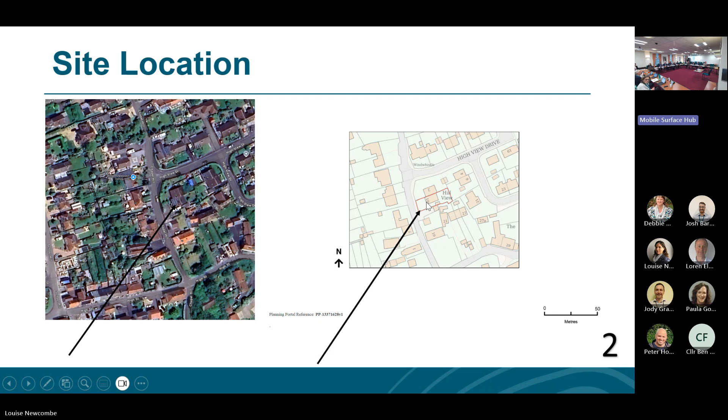As you can see here, this is an aerial of the street scene. The property is this little property here. It's quite a slightly higher gradient compared to the other properties surrounding it, slightly lower than this property here. And as you can see on this block plan here, the location of the property in relation to the surrounding dwellings.

This is the existing and proposed site plan. On the left is the existing and on the right is the proposed dormer highlighted in black, and then the outline of the single story rear extension.

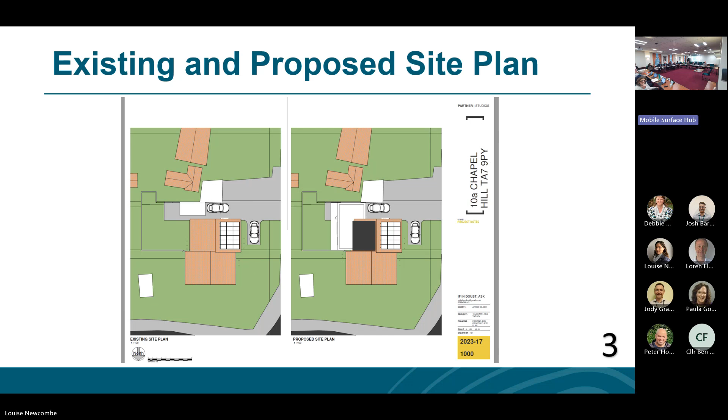So these are the existing elevations of the dwelling. As you can see, it's a semi-detached bungalow. And this section here is number 2 High View Drive, which is attached to, but it's slightly set back in a lower elevation to the bungalow.

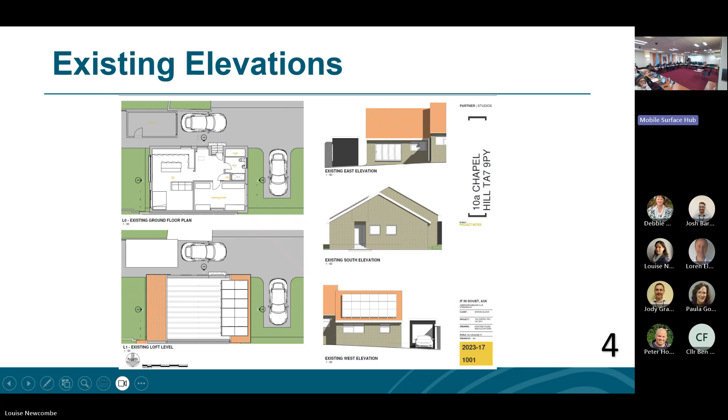These are the proposed elevations. As you can see, this is the proposed dormer and then the single story rear extension to the property.

This is an amendment to what was originally proposed. Originally, the exterior materials were black in colour, so we requested a change in external materials to match the existing dwelling. So the dormer will be like a grey cladded exterior, and the extension will match the rest of the dwelling.

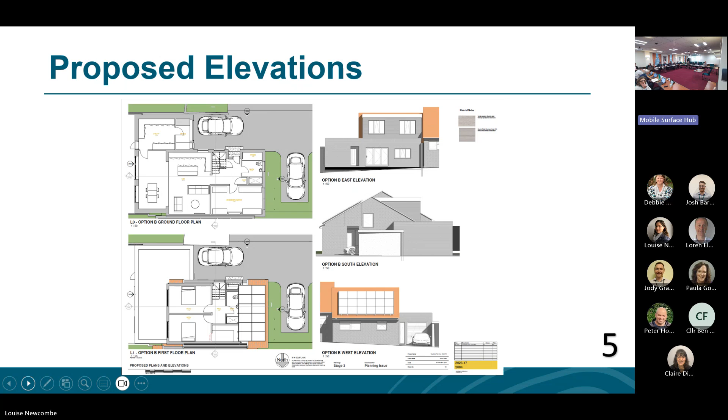This is a view from the rear of the property. As you can see, that relationship between 2 High View Drive on your right here, and then at a lower level, 10A Chapel Hill.

Again, seeing that relationship between the two. This is looking to the east. As you can see, there's already an example of the dormer within the street scene. There are other dormers surrounding on other properties as well.

And then this is a view from the front of the property. So the extension doesn't project past any of this. It just kind of fills in this little gap here.

So these are the relevant policies. Visual amenity wise, the proposed development is an acceptable design and appearance that respects the main dwelling. As mentioned already, there are examples of rear dormers on the surrounding dwellings, and again, there was a change from the original scheme from black cladding to one that respects the dwelling.

The parish council are objecting on grounds of overdevelopment. However, elements can be considered under permitted development rights of the dwelling.

In terms of residential amenity, 2 High View Drive is immediately to the north. 6 High View Drive, which is the dwelling you saw with the dormer, is 24 meters to the east, and 21 High Street is 14 meters to the south. So there's no overbearing impact seen from the proposed dormer.

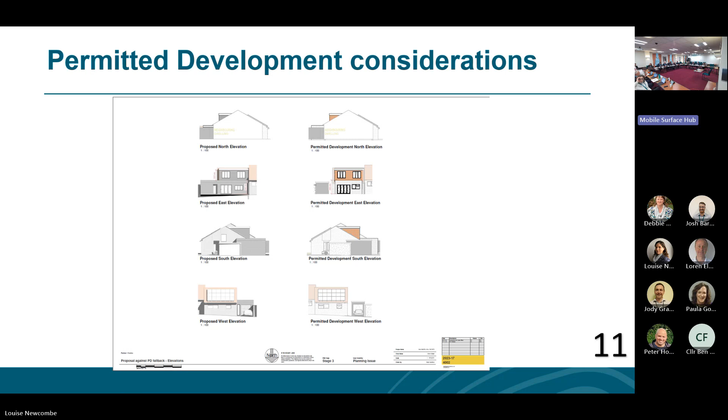So the recommendation is to grant permission, as whilst the garden is on a small plot, the proposed development is in accordance with adopted local and national legislation.

Thank you, Louise. There are no speakers for this application, so open it straight away for questions, debates, proposals. Councillor Hendry.

If there's no further debate, we've got a proposer and a seconder to grant approval as per the officer's recommendation. All those in favour, please show.

And that's unanimous. Oh no, sorry, I'm so sorry. Can you do the count, please?

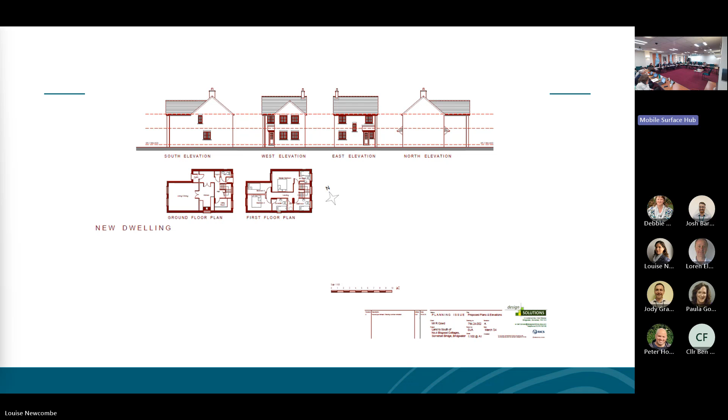The application has been accompanied by a noise assessment, which has recommended measures to avoid any detrimental impact on the amenities of future occupants, and the council's environmental health team have no objection to this approach. That's the reason for the layout in terms of accommodation being located more on the front and west side of the property. Overall, it's considered the design, scale, materials and construction of the dwelling will be acceptable given its context and the character of the surrounding area.

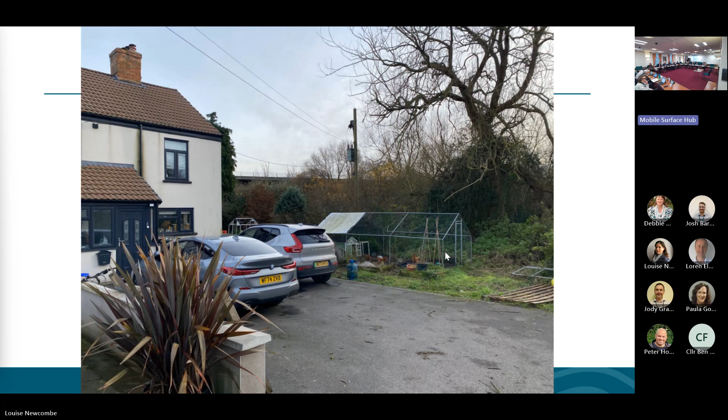These are photographs taken from the front of the site. As you can see, there's an existing parking area for property number 4 on the left, and the new dwelling will slot inside this area with parking extended to the front to provide off-road parking. The site will be accessed by the shared access which serves the existing terrace. It's predominantly a replication of what's already there in terms of parking areas with residential amenity space in the rear.

In terms of issues raised during the course of the application, the majority have been covered by further information and working with the agent and applicant on addressing each concern. Issues such as flood risk and ecology, raised by statutory consultees, have now been addressed through submission of further information. In terms of impact on residential amenity, given the location of the dwelling to the south of the existing terrace, there would be no significant impact through overlooking, overshadowing or visual domination.

In terms of the main issue that's been brought to members today, it's the proposed access, which will be shared from the existing access along the south of the River Parrett, known as Somerset Bridge. As you can see, the existing access isn't in the greatest shape in terms of its condition, and it is also home to an existing public right of way, with concerns raised by the public rights of way team. There should be a correction within the report.

Within the consultee section, you will notice that the public rights of way team have raised concerns as part of the statutory consultation that took place. Rather than being read as comments, that should read as an objection, which the rights of way team have set out within the supporting text that accompanies that section of the report.

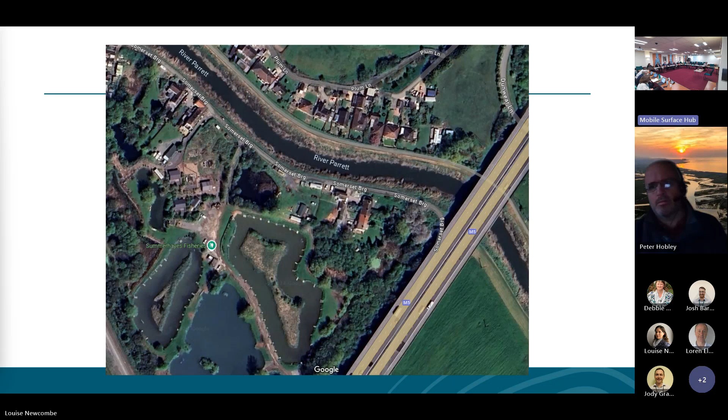Thank you very much for that. Can I just ask our rights of way officer online, please? Liam, you did mention his comments during your presentation, but for clarity, really, for my sake, because I am slightly confused still. Within the report it says we have concerns about an increase in vehicle movements in terms of the health and safety of the public using the path, as well as an increased rate in surface deterioration. But then it says there's no objection, and it just seems to contradict each other. So if Mr Hobley is there online, I'd be grateful for his comments, please.

Yes, thank you, Chair. Hopefully you can all hear and see me. Yes? Yes, we can. Good, thank you.

We respond in the guise of the Highway Authority, and as a Highway Authority we have a duty under Section 130 of the Highways Act to protect and assert the rights of the public to the use and enjoyment of highways. This public footpath is a public highway, so highway law applies to it. In that respect, any introduction of an increase in vehicular traffic to that shared use with private vehicular use is a concern, particularly as there's no segregation or separate footway for the walkers. So the no objection was subject to the applicant demonstrating that there was no net increase in vehicular movements over the public footpath. We haven't had that satisfaction, and therefore we do object.

Thank you for that clarity. Any other comments, questions? Then I would be looking for a recommendation.

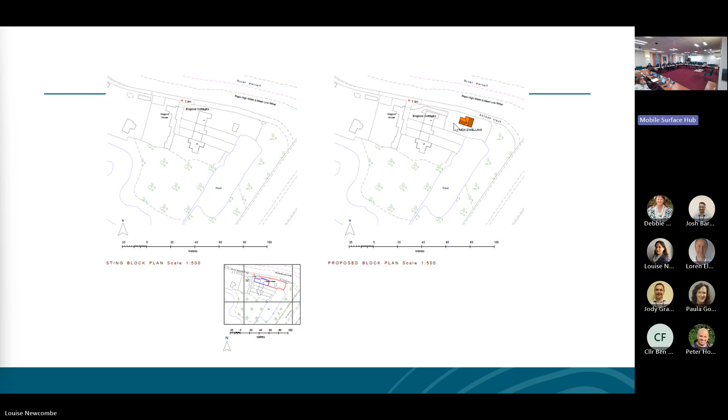No problem. This presentation will be a little bit shorter because I think we've covered a lot of the issues already in the first application. But effectively, what we've got is the second proposed dwelling to the east of Bisgood Cottages, using the existing access to the north of number 1 to lead to a new dwelling here to provide garden parking, much like the first application we've just dealt with. So what we have here is the new dwelling located to the east. The separation distance between this and that is the standard 20 metres, so there will be no overlooking window to window between this property and that property here.

The design internally is the same in respect of the proposed living areas being located on the west side of the dwelling, with the less-used bathrooms and staircases located on the east side, to avoid the issues of noise generated by the motorway. But in effect, the proposal is a replica of what we have down here, but just located to the east of the terrace. Again, you've got a similar arrangement. The site itself will be located to the rear of number 1 here.

As you can see, it's an existing garden area belonging to number 1, which is quite large, but as the agents referred to on the previous application, is quite untidy at the moment. Through the additional information provided via ecological assessments and recommended conditions, there should be some biodiversity enhancements and mitigation taking place within this area. In general, it doesn't contribute much in terms of visual amenity to the surrounding area, and the provision of a new dwelling here, within the development boundaries, would be acceptable.

It's just a repeat of a couple of slides in the previous application in terms of the access route, which would be the same as the previous application. In effect, we would be looking at a new dwelling located to the east of the terrace this time, again utilising the existing access.

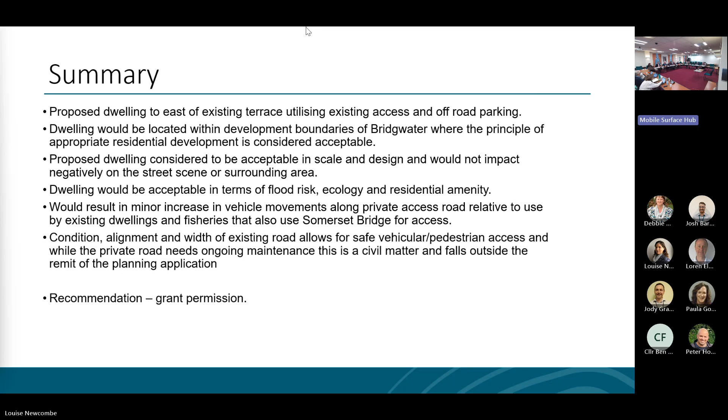Thank you. Okay, I don't wish to repeat what I said on the comments for the last application. I do in fact have less objection to this, as it doesn't directly affect me. What I would say, if these plans are passed, I would ask the applicant to consult and we can agree on the best way to carry out construction without too much interruption.

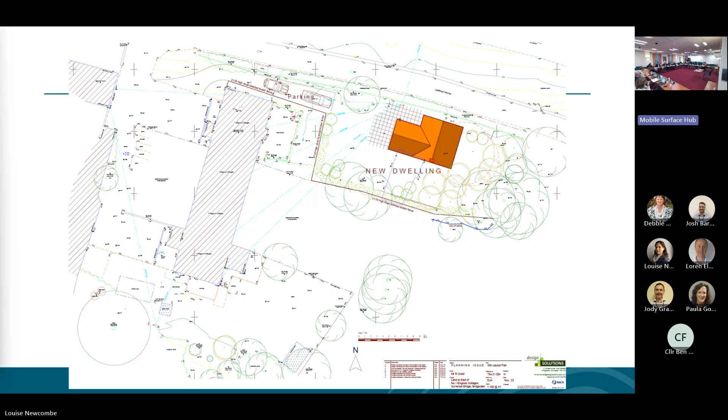So thank you, members. That brings us to the end of the applications for the afternoon. We just have the appeal reports for note now. Thank you, and Gary, are you taking these? Yes, thank you, Chair. Nothing really to speak to you about this time around in committee, because the appeals report is solely reporting that I think it's 3 appeals have been received since the last meeting, so no decisions from the planning inspectorate to report back on. So nothing further from me on this one, Chair.